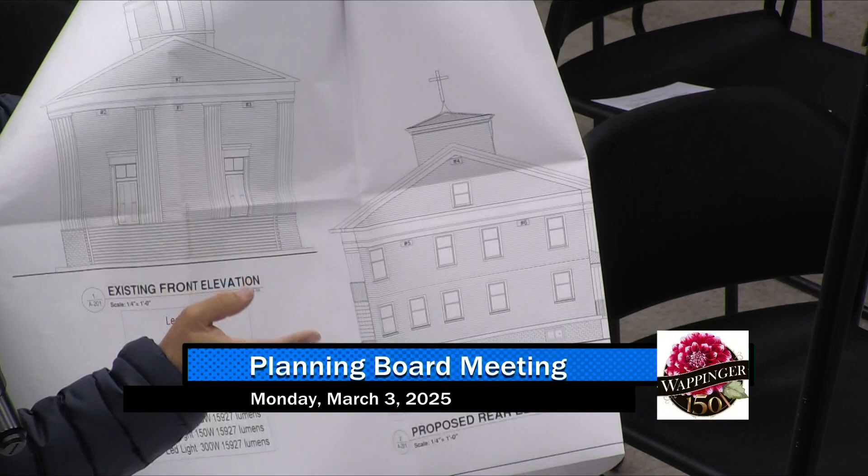So what you're doing is you're just listing out the lights with their wattage. Okay. But obviously the one big one that's real bright, that one just has to go away. We know that. But I think what they're looking for is a photometric plan showing the lighting level, showing that you're compliant with the zoning code.

Okay. So that would be measured in foot candles. You would have an image of the site, the locations of the lights, and the foot candles associated with that lighting. That'll give us an idea of what the lighting is, if it's code compliant, and if it's not, we'll have to modify it. Yeah. There was one issue with some lights that were outside the property; they were removed and relocated, so we don't have those lights anymore.

Okay. And there was also something with the report. I had a comment regarding SEQR. It's a Type 2 action, that simplifies things. The SEQR review is concluded.

Okay. Something that came up in our discussion earlier, though: there is a ramp. It sounds like you're going to maintain the section of the road that loops around the building as a walkway, so that people can access those entrances, those fire escapes, those ramps. I understand that there's nothing changing about the parking, but do you have a situation with handicap parking spaces? Is there an area where you encourage those people to park to provide them access? An idea would be to reserve some spaces in the section of the driveway that loops around the building that would go up to the ramp.

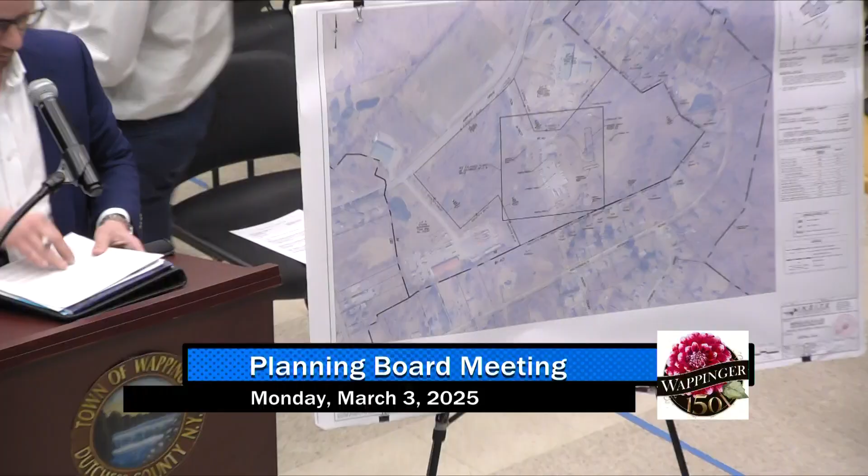As you mentioned, Mr. Chairman, while we're setting up the easel here with our site plans, we are before you this evening in connection with an application for amended site plan where we're proposing to add a warehousing component to the existing operation at the property. Before I do turn it over to Rich, I want to make sure not to steal all of his talking points as far as the review of the site plan and related analyses that were submitted. I did just want to give you all a quick background about the proposal and the project, as this is our first meeting for the project.

As is more fully detailed in our February 3rd submission to your board, and as we discussed actually with town staff back in November of last year, we are proposing to install a 10,000 square foot asphalt storage pad, a yard hydrant along the northern property line, and a more centralized portion of the premises that really abuts Tri-State Filter HVAC supplies at 72 Airport Drive, and as the board mentioned during its work session, proximate to where the cell tower is on the site plan.

The storage pad would be installed just to the east of the existing improvements, which again is an existing office building and parking, and it's about 140 feet from the residential development to the south of the premises, and we actually have some visuals that show how far set back we are from those locations. And as also mentioned during our work session, there's this substantial berm and topography that helps with this site in setting down these improvements.

The property is northeast of the Hudson Valley Regional Airport and is currently improved by the existing Bettini Fuel Transportation Terminal, which includes a paved truck parking area, as well as a 2,400 square foot building for office and maintenance purposes, and then, as we mentioned, the Verizon cell tower that's on the site. It's about a 30-plus acre, 33-acre site, and it's presently classified in your airport industry zoning district, and there's a host of other uses in the area, residential, but there's also commercial, recreational.

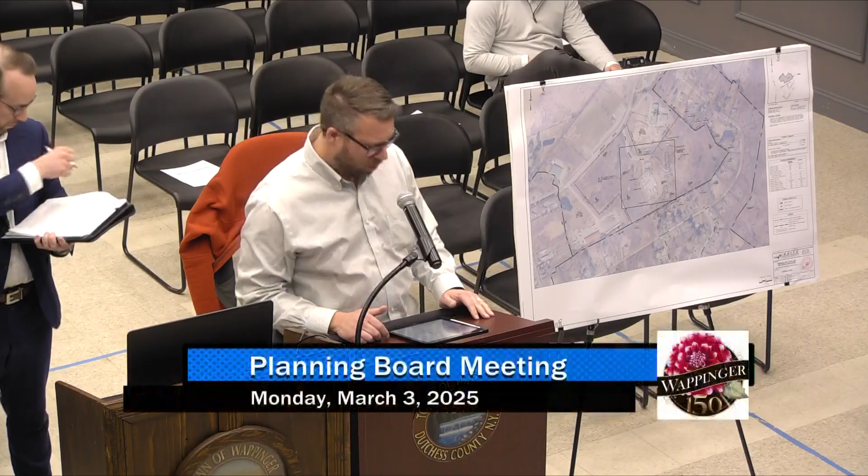Okay. Good evening. For your record, Rich Williams, Insight Engineering. Just slide this back so I can talk at the same time. So as Taylor mentioned, 33.44 acre site, AI zone. What you see, and just to get you oriented, north is up on this plan. You have Airport Drive, Don Bosco Boulevard.

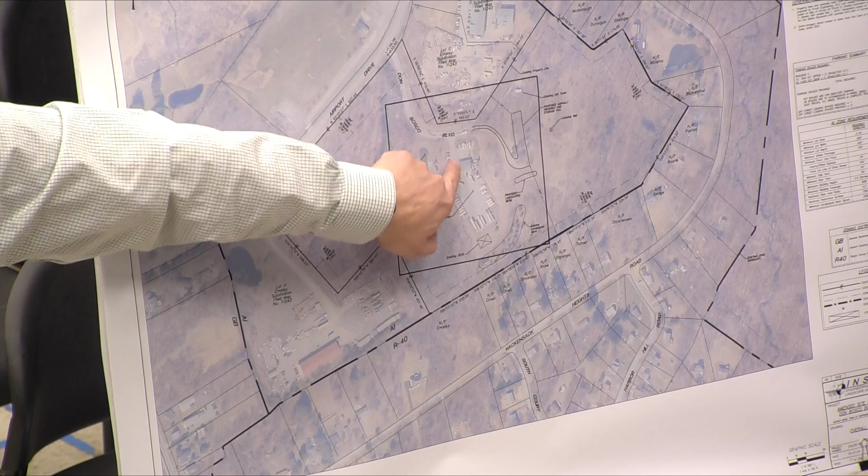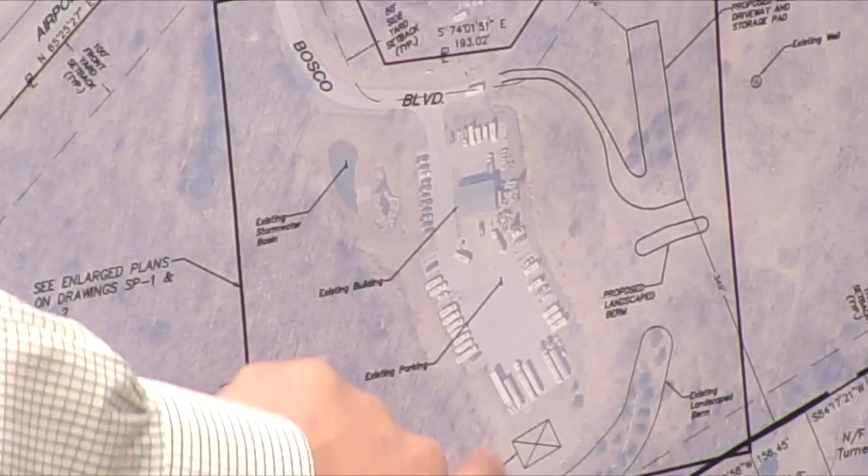We have the existing 2011 site plan for a 2,400 square foot building, which has 800 square feet of office and 1,600 square feet of maintenance shop and associated parking. The septic area is located just to the south of the existing development. There is an existing stormwater pollution prevention plan that was approved, which consisted of swales, drainage collection system, and a pocket pond being located right here on the property.

We did see comments come in from Mr. Andrews. We will do an evaluation of the existing system, and we can add that supplement into the SWPPP, and it's a fair comment. What you see is we have a cell tower just to our northeast.

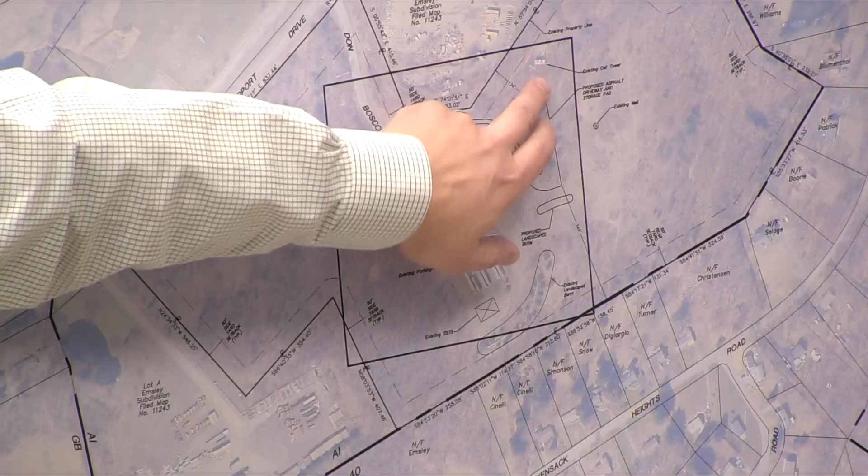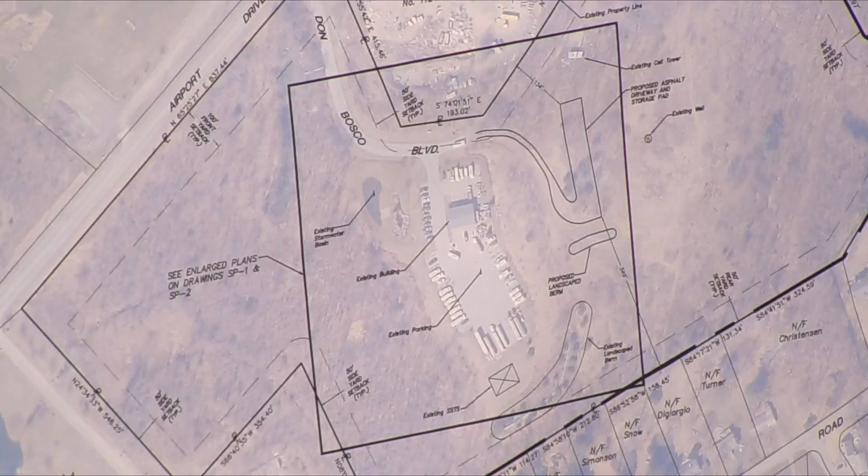As part of a previous application, you can see the surrounding uses. To the north, we have some more industrial commercial. As you move east and south, we have residential. We have Hackensack Heights Road located to our south. What we're proposing to do is construct a 10,000 square foot asphalt storage pad, as Taylor mentioned. It's going to be located in this portion of the site.

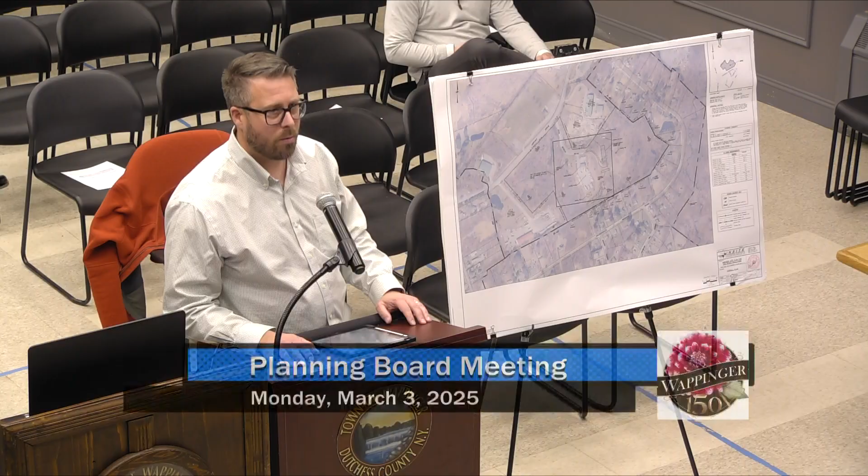Just to provide you with some distances to our neighbors, we are between 320 to 350 feet from the property line. That's 320 feet from a berm I'll talk to you about in a couple of minutes, and 350 feet from the pad to our nearest neighbor. And if you take a look at the houses, we're about 511 and 550 feet to the closest houses to our south.

In designing this asphalt storage pad, a couple of things. It's a simple pad for us, but no simple thing doesn't warrant its thought. First, we wanted to try and balance the earthwork. So what we did was we set this up as a cut to fill, and we set the asphalt pad into the hillside, which again allowed us to do the cut to fill to try and balance the earthwork, while at the same time allowed us to set the elevation of the pad lower into the ground to assist with screening.

In addition to that, we did respect the previous approvals, recognition of a berm to the neighbor, and I'll just point that out. It's right there on the site plan. As mentioned during the work session, we are farther to the north, but we also thought a berm was warranted, just to kind of continue the theme of what was previously approved. We do have about a 5-foot tall berm. Line of sights, we believe we're far enough away that there'll be plenty of screening. And if there are comments to add additional screening, we're happy to work with the board and staff to accommodate that.

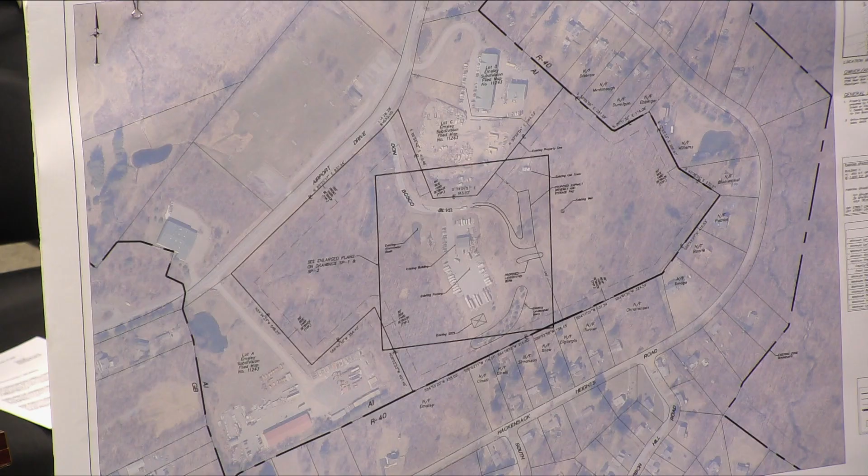Driveway, as you heard Taylor mention, there is an existing dirt trail that comes up that I believe was used to access the well site. We didn't want to go to 7%, so we designed this commercial driveway at 10%, in part because it is very infrequently used. So there'll be no parking. Trucks will be parked off-site. They'll come to pick up a dumpster or drop it off. We expect that there'll be many days where there's no trips to the site at all as part of this use. But on a maximum, it would only be 1 to 2 trucks per day.

So to that end, there's no on-site parking, there's no storage of trucks. This is just about the storage of the containers and the trash cans. So with the minimal use, we looked at grading in a 7% driveway, but over several hundred feet, that actually lowers you into the ground even more. As we started to dig that deep into the hill, it became tough to do a cut to fill without expanding the grading pad. So by using a 10% driveway, we're able to get a little higher in elevation and get that earthwork set so that we can balance, because again, as site designers, that's a goal we try to achieve whenever possible.

We have provided a stormwater pollution prevention plan. As an initial cut, we did not provide any practices that are prohibited in what's called a hotspot use. We received, obviously, Mr. Andrews' comments, and we have a little bit more homework to do with respect to how this might be interpreted under the code, and we're happy to continue that conversation with them. And if it does warrant additional treatment because it's a non-stormwater discharge, we'll explore what that means and work through a solution. Okay. That being said, happy to answer questions.

Any board members have any questions with this? Refer to the professionals. You want to start with the professionals, all right? Well, go ahead. All right, well, do you want to start, John, or? Well, I can start. He used my name in vain a couple times. You have the bigger.

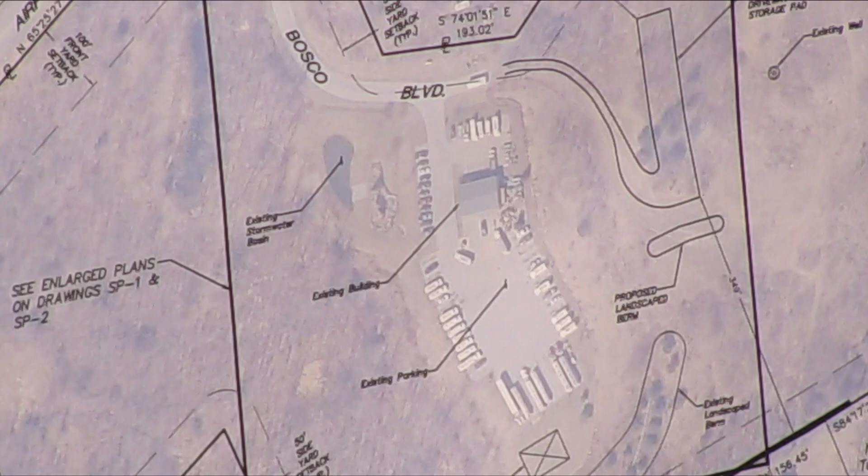I would also just include that use into the parking calculation. I think that you're probably overparked. If for whatever reason additional parking is required by code, I think that this is a very good case to make for land bank parking as opposed to increasing. But I would like to see that updated.

It also made me curious whether or not the bulk table had been updated. Okay, so just wanted to verify that the bulk table is showing proposed conditions with this proposed project and not left over, in which case, no shocker, it is a very large site. They more than comply with all of their bulk regulations.

They discussed the existing topography of the site, the existing screening that was provided at the time that the transportation terminal was put in. They are quite a ways away from most of the residential areas, and there is natural topography between those. That being said, do you want to? We have a site section that we have right now. Yes. So there it is.

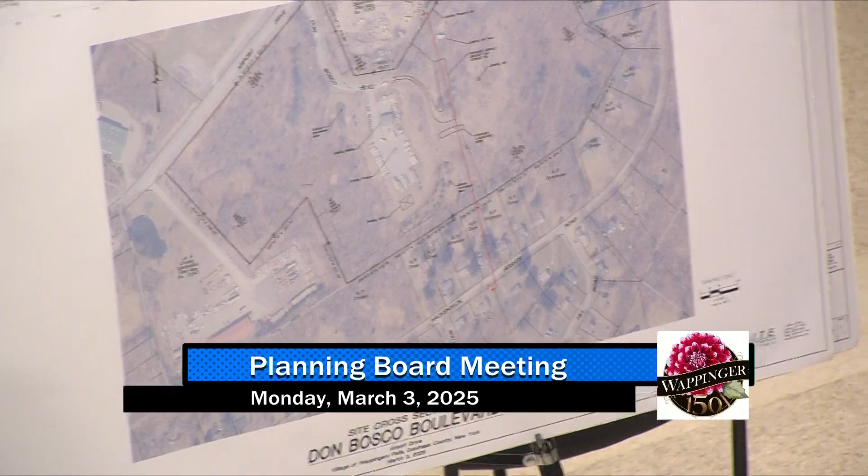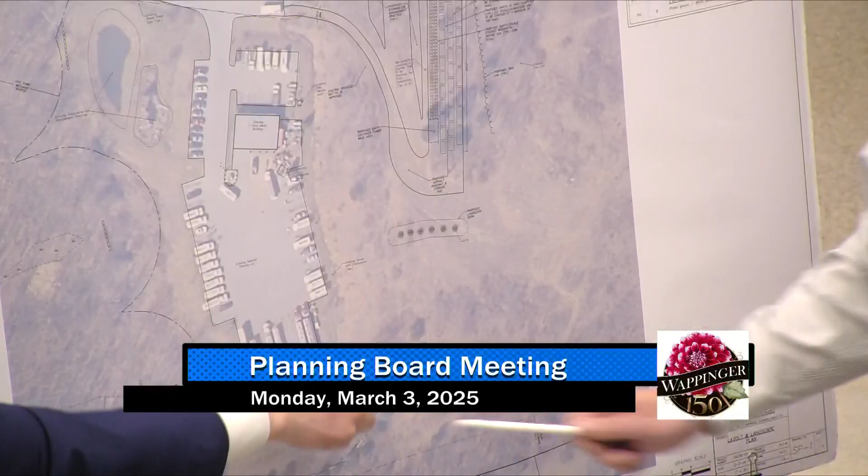So that gives us an idea of the local residential neighborhood and the topography in relation to what is being proposed. That being said, if you just pop that down so that we can see what is below it, you can see the proposed berm just south of the proposed pad, and you can see the existing berm. And the existing berm is to the bottom. You see the evergreens, and it also has a stockade fence going through it.

Where would the new berm be on the sight line, the red line down on the bottom? Seven, eight dots up there. Yeah, but is that a view? In the cross section, it's just a view? Point to it in the cross section. There you go. Yeah. Gotcha. So it'd be right there. And the viewpoint is sort of like a first floor. Yep, level, and then it goes up the hill, and there's still the berm on top of that. We actually drew that red line on the second floor.

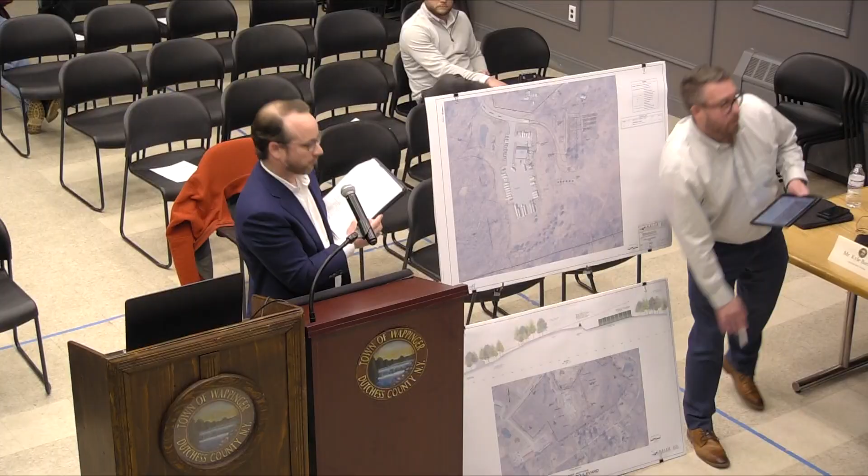Okay. Gotcha. Okay. So with that, I leave it up to the board. I think that the berm could be enhanced. It could also be elongated to meet the existing berm.

That being said, it may not be necessary, it is up to the board. The only thing I would, make a hook to the south and connect it. Yeah, I would suggest that, this gave me a bit of a heartache, seeing it this way, and then when you look at the grading plan, the grading plan actually makes more sense in terms of, if you overlay the two, which I did, they fall right on top of one another, and it does simplify to this

shape. But what I would think is perhaps we could kind of elongate and turn a little bit more to the south on that berm, and maybe give it a little more elevation on the front side, you know. Because I don't care what the dumpsters look at, but I do care what the neighbors look at. And if you gained a little bit of elevation on the downhill side and maybe staggered your trees a little bit, it might enhance that view.

And I'd rather not see you move much farther to the south, because I don't want you increasing your limits of disturbance. But I think you can accomplish it all within the footprint you got. One of the things we're being sensitive to is, you know, we can hook it this way a little bit, sorry, thanks, Doug. We can hook a little farther to the south, but we're being sensitive to not wanting to clear vegetation to plant vegetation. Yes, understood, and we'll strike that balance.